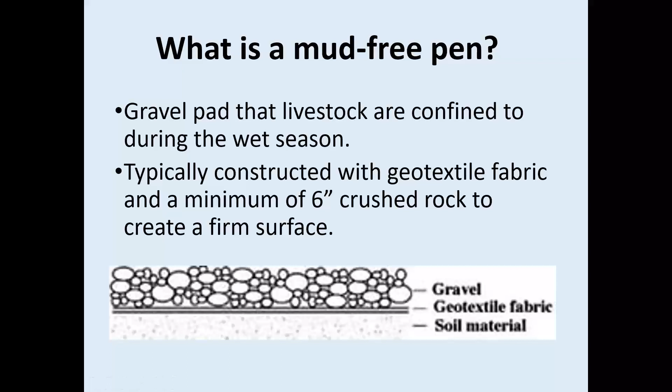The main reason for this fabric is it allows the gravel to float on top of the native soil so it doesn't sink down in. Otherwise, if you were to skip this and just put gravel down on your native soils, the gravel would sink and the mud would ooze up through, and you would still have a mud problem instead of the mud-free pen we're hoping folks will make.

These are really important management pieces, especially on small acreage properties, for keeping horses and livestock, especially during the winter time. We may accidentally refer to them through the presentation as heavy use areas, since that's often what we call them—heavy use areas, mud-free pens, we use the terms interchangeably. Some folks also refer to them as confinement areas, since that's where the animal is confined a lot during the winter, or winter pens and paddocks, and sacrifice areas. So there are a few different terms, but mud-free pen is what we're calling them for this webinar, and a lot of times these are built adjacent to barns and shelters.

Since that is where you're going to get most of your heavy traffic during the wintertime, where you're feeding animals, folks will also build this style of mud-free area around water facilities or around gate areas, just to make sure those heavy traffic areas stay mud-free during the wintertime when we get a lot of moisture.

Why create a mud-free pen? One main reason is to help create healthier pastures. If horses or livestock are out on pastures year-round, they become overgrazed, and in the wintertime soils get very saturated. If animals are out on pastures during the wintertime, it compacts the soil and decreases the pore space, which is important for grass roots and for holding water during the summertime months. Those pore spaces can hold more water and help your grass grow longer. All of the compaction and heavy traffic can lead to bare and muddy areas in a pasture, so mud-free pens, or heavy use areas, are very important for keeping pastures healthy year-round.

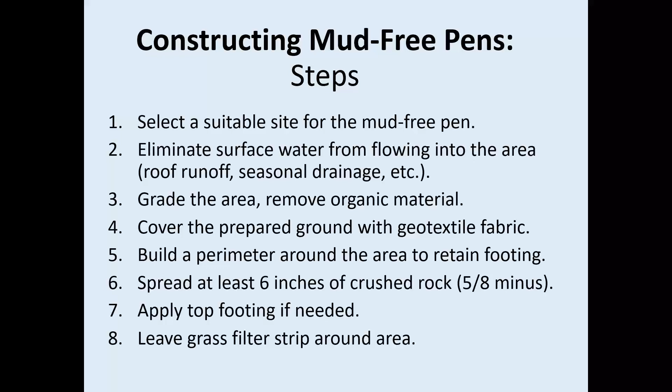Okay, so the first thing is to select a good site. You want to try to pick a high and dry location away from streams, ditches, wetlands, ponds, and as far away from a domestic well as you can get as well.

So many people are already using an existing barn or shelter that they have. If you can build new and create it at the same time you do your barn, then that's where you'd also try to site your barn away from these items as well, away from all waterways. So typically the pens are going to be built next to an existing barn or shelter, just so that they can also be easy to feed the animals in, to get in to clean up manure.

And then it's great if you can even incorporate these gravel sites as a way that a hay truck could access your barn. So that, if you need to get a hay delivery in the middle of the winter, you can hopefully open up gates and they could drive through that gravel area and get right into your barn if you didn't already have some kind of gravel driveway going to it.

It's also a really good idea to think about lighting, if you're able to put up some lights so that you're not out there cleaning up manure in the dark out of the pens, because you do want to clean these areas daily if possible, but even every 2 to 3 days can work out as well.

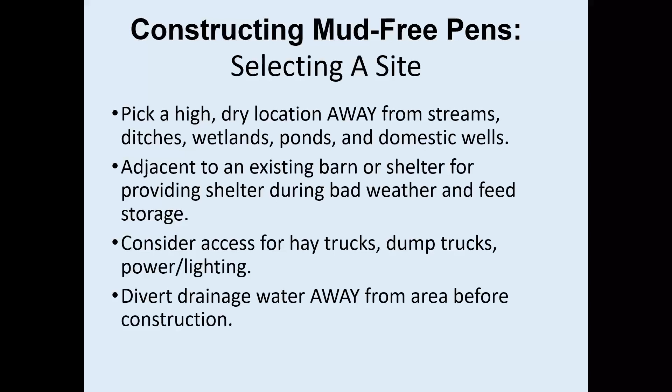So just to put into perspective how much rainfall we get, it really ranges in our county. In Sequim, we get about 16 inches, in Port Angeles roughly 25, then 45 in Joyce, and 118 in Forks. So basically, the further west you go, a rule of thumb is about 1 mile west is roughly an inch increase in rain. And then it also does increase in the foothills as you go up in elevation.

But really, it just does show a good range that we have in our county. It's very diverse. What's interesting is that even in Sequim, you would think with the low rainfall, we wouldn't get that much mud compared to Forks. But interestingly, the soils in Sequim are not terribly well drained. Same with Port Angeles and Joyce, not very well drained at all. So we tend to get a lot of mud in these areas, even though it gets less rainfall than Forks, because Forks has some very well drained soils.

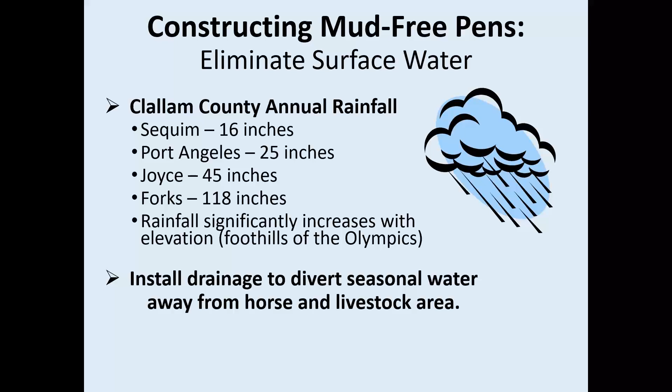So really, we've found that countywide, there's not very many soils that can get away with not having a gravel type of pen in order to have a mud-free winter. Most of the time, they're really necessary to have. And again, as I mentioned, you want to install that drainage to divert any seasonal water away from the area.

So an interesting number is that just 1 inch of rain falling on a 1,000 square foot roof will produce 625 gallons of water. So it's very important to try to keep any roof runoff, even if it's just a small shelter, out of the gravel area, because even a small little shelter can produce a lot of gallons of water a year.

So you want to try to keep clean water clean. That's why we really like to see the gutters and downspouts on there. And you want to make sure you bury the line from the downspout about 1 foot deep at least, just to make sure that you're not going to be driving over it and breaking it. It's actually better to go even deeper if you can, and then either drain it into a dry well or into a suitable vegetated area that's away from animals and buildings.

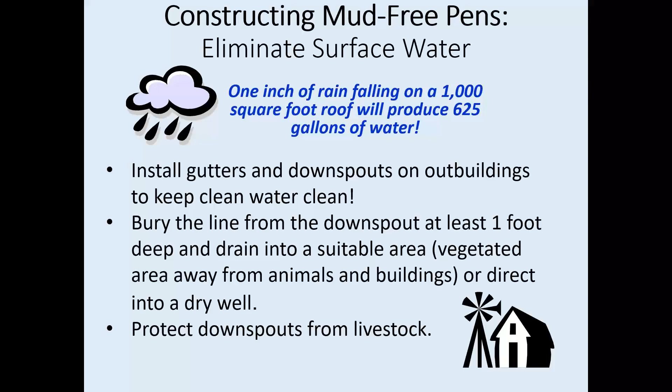And then the other key piece is to make sure you protect the downspouts from horses and livestock. A lot of times they'll rub up against those metal downspouts and just completely crush them. So a better way to go is a very thick plastic pipe, like a sewer pipe, or a metal pipe, or something you can encase them with. I've even seen people use tires around the downspouts if they have cattle, put the downspout on a sturdy post and then surround them with tires just to protect it. But really protecting those downspouts is key to making sure they're not going to get ruined right off the bat.

A dry well is basically a big pit sized based on the size of your barn or shelter roof, usually filled with drain rock and covered back up with native soil. That big pit filled with drain rock takes the roof runoff coming off your roof and slowly filters it into the ground.

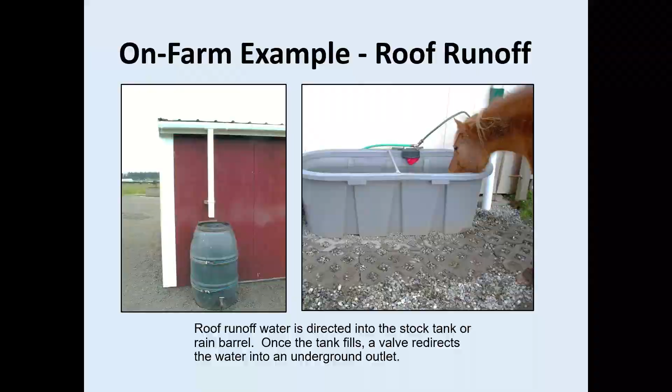The next step after you divert your roof runoff and have your site picked out is to grade and prepare the site. You want to remove any sod or organic material such as manure in the area where you're going to make your mud-free pen. You want to achieve a slope of about 1 to 2% away from the barn or shelter to make sure no water comes back into your barn, and so you get a little runoff of any rain that falls so you don't get ponding.

Some folks who have built pens that are fairly flat have found there is a little bit of ponding, so the 1 to 2% slope has been a good rule of thumb to try to achieve if you can.

Unless you're trying to match up to an existing grade, such as the entrance of a barn you're already working with rather than building new, you don't want to excavate out soil. What you want to try to do is build up as much as you can and not dig down. If you dig down, you can end up hitting a seep or spring in the ground, as well as having more surface water potentially come into the area. Building the gravel pad up really helps keep the area high and dry.

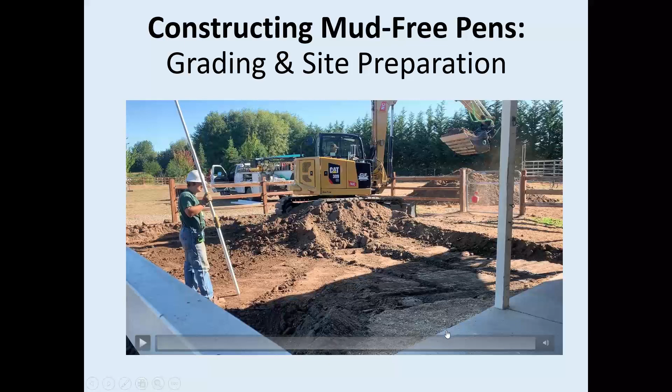You can see in this situation that this is also a barn these folks are working with, and they're having to dig down just a little bit to match up with the grade this barn is already on. If there was no barn here, they wouldn't have to excavate like this—they'd just scrape off a little sod and add the gravel back on. But this is another example of where they have to dig down just a little bit.

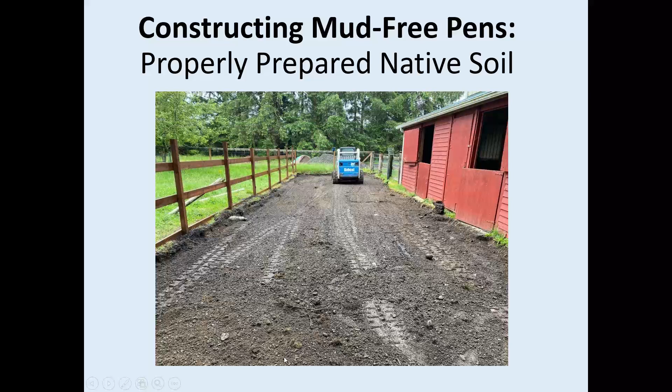Okay, so now we're going to get into the geotextile fabric. This is a very heavy-duty fabric commonly used in road building—forest roads, gravel roads, foothill soils and things like that. Contractors put this fabric down underneath the rock, and like I mentioned earlier, it keeps the gravel from sinking into the native soil, so you're not constantly having to add more gravel and it doesn't cost more money. It does somewhat allow water to go through, but it mainly prevents mud from coming up—that's the big goal of this geotextile fabric.

It can be found at places like Angeles Millwork—I'm blanking on where else, but I know there are some places in Sequim that have it too. Typically it comes in about a 12.5 or 15-foot wide roll, and you can go into the store and buy it by the foot. For instance, you could buy 100 feet, and that section would be 100 feet by 12.5 feet wide. It's best to get the heavy duty, woven material, almost like a tarp, versus the light duty material, which is felt-like.

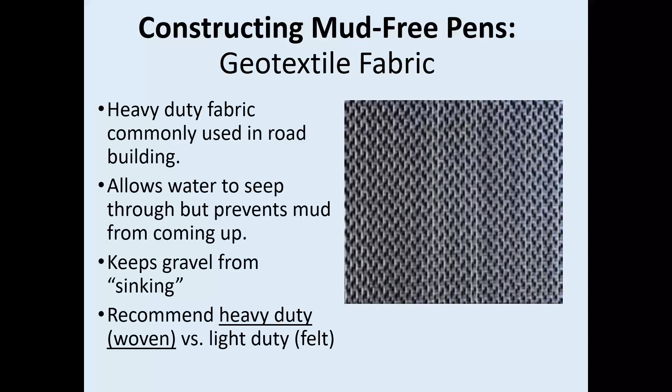The next slide shows the differences. The geotextile fabric here is very shiny, like a tarp—it's woven. Whereas this felt-like material is more like landscape felt, but it does not hold up over time. The true geotextile woven material will last for many, many years. I have one I built about 15 years ago, and there's really no damage to the material. Versus this one with the felt, which actually started to disintegrate, and I believe mud did start to come up in a couple places after just a few years of being installed. So it's really worth paying a little more and sticking with the heavy duty material.

I'm going to back up one slide to make mention of something. In this particular slide, this was one that I built—we dug a little trench around the edges so we could tuck the geotextile fabric in, to keep the edges from unraveling. It's not necessary, but it's one more step to keep it neat and tidy. The other thing we did is use fabric staples, kind of like a big 4 to 6 inch staple, and pound them in various places around the fabric. That way, as we'll see in a couple slides later, the dump truck could back right over to spread the gravel without making the fabric shift or bunch up—it kept it in good position so it could be driven on to be spread with gravel.

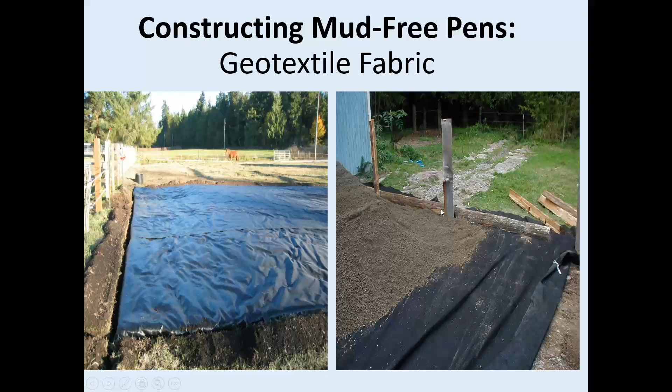Here we are building the perimeter. It's good to retain the gravel. It's not a have-to, but some of the most successful heavy use areas we've seen, I'd say the longevity is increased by building a perimeter. So you're almost building a sandbox for gravel, a gravel box basically. You can use railroad ties, cedar fence posts, pressure treated boards, anything like that, laid right along the edge of your geotextile fabric, and then build the gravel up against them to retain it so it isn't spilling out into the native soil. When it spills out onto the native soil, grass tends to grow up, and over time it can be more of a maintenance hassle.

These railroad ties are actually one of the ones I've built. Rebar stakes were used to anchor these. There are holes drilled in each end of the railroad ties, and a 3-foot section of rebar was driven down into the soil to help keep these in place so they didn't move.

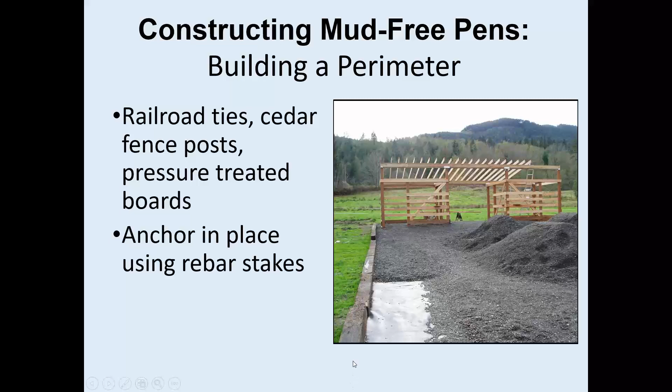And the other thing I did is make sure the fence was put on the perimeter of these railroad ties. That way the horses aren't walking directly on the edge of the railroad tie. What can happen if they are is it tends to push the railroad ties outward.

The same thing applies even if you had no perimeter and just laid your gravel right down with grass alongside it—you'd still want to put your fence offset a foot, maybe even 2 feet, to keep the animals from walking right along the edge of the gravel, which would cause it to slough off over time. It may even cause the horses, cattle, or whatever animals you're putting on these gravel areas to get down to the geotextile fabric.

If they do get down to that fabric and cause a hole to be made in it, it can cause mud to seep up through these areas. So you really want to protect your geotextile fabric at all costs to ensure you're not having mud come up through a torn spot in the fabric. And if you do put your fence on the outside edge, just make sure you offset it by a hot wire. That alone can keep the horses backed off enough that they're not walking right along the edge.

The next thing you'll do is spread the crushed rock. In this instance, this is the same one I've been referring to that I built. The railroad ties are already in place on the opposite side from the dump truck, but we knew we wanted the dump truck to spread along this edge to save time. So we had him start spreading all the rock, and after he'd spread quite a few loads, we came in and put the perimeter up along that far edge.

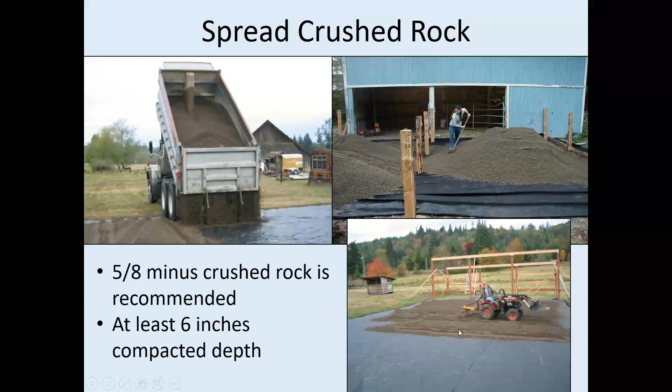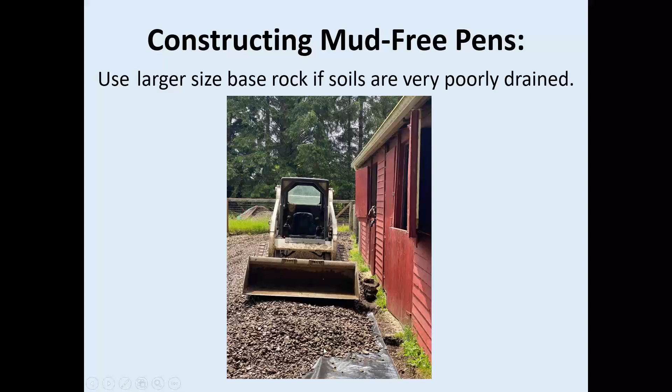Some folks will use a larger size base rock underneath that 5/8 minus if their soils are very poorly drained, or if they need to build up quite a bit. We've had a few instances where people build their barn at the top of a fairly steep slope, and then they want to install one of these areas, but at the far end they might need 2 or 3 feet of material to bring it up so it's not such a steep slope. That's another time where you can use a larger size base rock for better drainage, or perhaps the larger pit run size material, which is typically cheaper than 5/8 minus. So you can spread that, and then put the 5/8 minus on top.

A really key piece is to compact this rock as best you can. So if you don't have a contractor out there with a roller, what you're probably going to want to use is a plate compactor.

As you can see this gentleman using one, I'm going to play this video really quick so you can see they're quite easy actually. Once you're able to get them unloaded out of whatever you pick them up in - I believe you can rent them at D&K Rentals and Angeles Millwork - they're almost just like a walk-behind lawnmower.

You can really just kind of walk behind them and they vibrate in place, and pack down all that gravel. The other thing to note is you don't ever want to go above 4 inches in depth for gravel with the plate compactor. So you can't just put all 6 inches of gravel down at one time and then compact it - it's only going to compact about 4 inches at a time.

So most people do their heavy use areas in 2 shots with the gravel. They'll get about 3 to 4 inches laid down and then compact it, and then get the final 2 to 3 inches down and compact that again, just to make sure it's packed very good, because you really want these to almost be packed as hard as concrete.

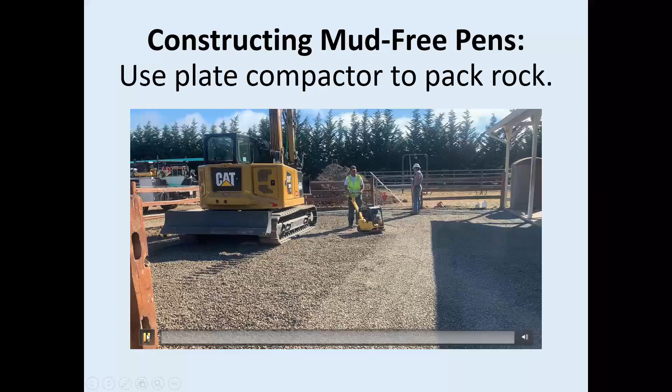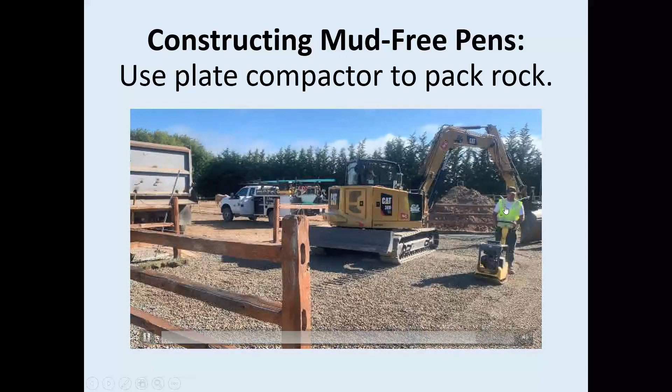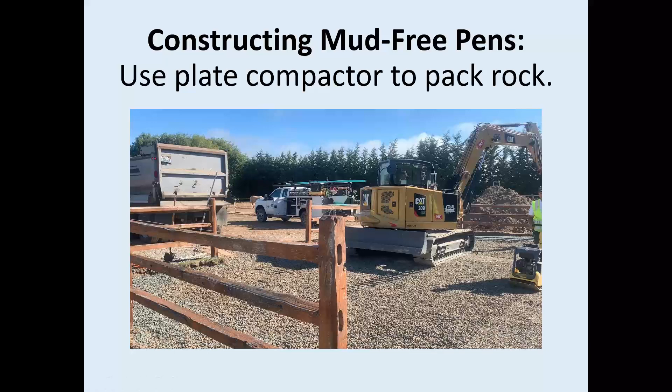I'm just going to play this video really quick so you can see him operating this. You can see he just walks right behind it and it kind of vibrates along. Turning is really, I think, about the hardest part of it - actually unloading it and loading it in the vehicle is probably a little bit harder. But these are very crucial to building a really well and long-lived mud-free area.

One other thing that some people like to add is a top footing. We generally don't recommend using it unless someone feels it's absolutely necessary for an animal's health or things like that.

What can happen with the top footing is, for instance with pea gravel, I had a very unfortunate circumstance where I put some in one section of my heavy use area, thinking it would be a great area for the horse. I was kind of doing it as a trial run, thinking it'd be great for her to go and lay down. Instead she would run to that area of her pen and do a sliding stop, so the pea gravel ended up mixing in with all that motion, mixing in with the crushed rock, the 5/8 minus underneath.

The 2 gravels mixed together, and since pea gravel is a round rock, it won't pack. So it was able to work into that 5/8 minus, and then she was able to start pawing in that area, which led to her pawing all the way down to the geotextile fabric, ripping a hole in it, and then the mud seeped up through there. So I dug the whole section out, patched it, and it just never was the same.

The mud would still kind of be able to seep up through that patch. So, lesson learned: unless top footing is absolutely necessary, it's kind of a good idea just to stick with the 5/8 minus.

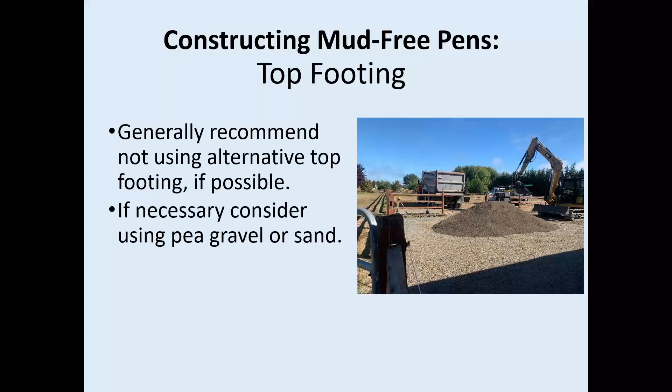Then just kind of see if your horse does need a softer area to lay down in. Sand can also be used, but there can be problems with that in that it can sometimes get some ponding. What we actually recommend instead is, if you do feel like a softer surface is needed for laying or rolling, stall mats or building a sandbox in a corner using shavings, sand, or hog fuel can be a really good way to go.

Okay, one other thing I want to back up on for a second. If you do pea gravel, we've had people have success, especially with older horses, doing pea gravel over the entire heavy use area. If you maybe only do an inch or two of pea gravel over the whole area, and it's an older horse that isn't going to be moving quite as much or doing sliding stops like my young horse was doing, then it can be successful to do that.

We've had a couple folks do that. One had draft horses, and the draft horses were laying down on the 5/8 minus and getting a little bit of sores on their hocks. So he put the pea gravel on top, and he was very happy with how that worked out.

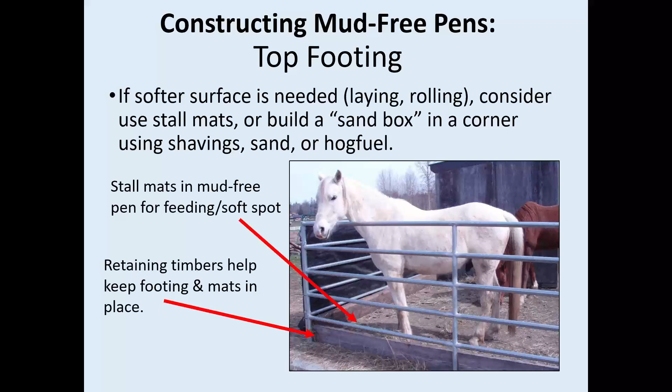That can also help if you have a horse that doesn't have very good feet. The pea gravel can actually be really great, and is recommended a lot of times by farriers to help stimulate the frog on the hoof for better hoof growth. So that can be another advantage to pea gravel. But again, I really would caution sticking with the 5/8 first, and only doing the top footing if there became a problem that you might need something different for.

Okay, so filter strips - this is the last thing in the construction steps that I wanted to address. Installing filter strips on the downhill side of the pen are really great to capture manure and sediment that might run off the gravel area. The width of the strip is going to be dependent on the slope of the land, but you really want it to just slow down that water coming off the gravel area and try to capture some of that manure and sediment.

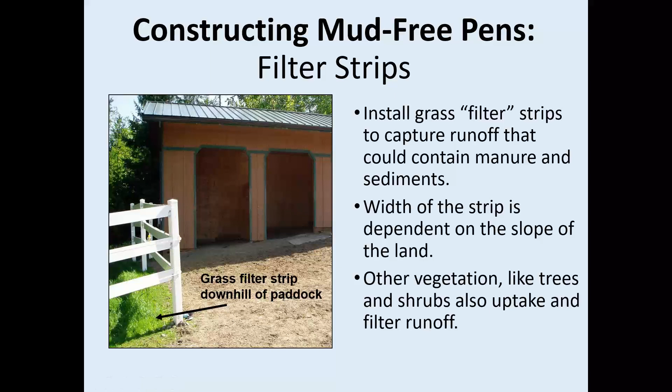You can also put other things in there - it doesn't have to be grass. It can be shrubs or things like that, but just anything that can help uptake and filter any runoff. You really wouldn't want to have a waterway just adjacent here, or a bunch of gravel that then continued on to a roadside ditch. You want to try to have that grassy filter strip to keep that contaminated runoff from going into waterways.

Okay, so that concludes the construction part of the mud-free heavy use areas. If there are any questions, I do see there is one question in the chat.

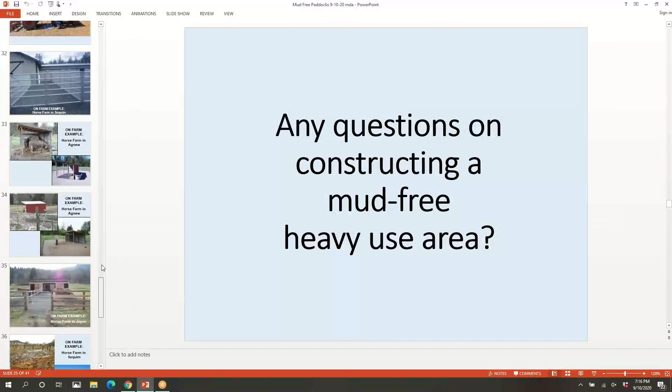Oh yes, thank you - Jennifer popped this up for me, that the geotextile fabric is available at Angeles Millwork, Hartnagel's, and then it may also be available directly from local contractors that do excavation earthwork. So thank you so much, Jennifer, for mentioning that. I was just having a little bit of a moment there where I couldn't remember where all we could find that.

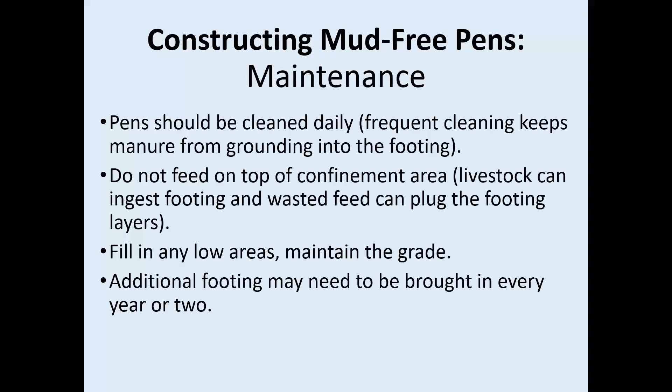You probably are also going to need to bring in more footing over time. Our ground is constantly settling, and there'll be areas where livestock tend to congregate or walk that will pack up. So you'll probably need to get in the habit of bringing in some rock every year or every few years.

So I mentioned a little about cleaning, and this really gets directly into the mud management piece of this puzzle, because livestock manure has a lot of moisture in it naturally. So the simple act of cleaning up manure will make a big difference in keeping these pens dry. The challenge is if you don't construct these mud-free gravel pens, as soon as we start getting fall rains, it's going to turn into a muddy mess, and you won't be able to tell what is mud and what is manure, or push your wheelbarrow through. So once you have these gravel pens installed, cleaning up the manure on a regular basis will make a long-term difference in keeping these pens around and keeping your livestock healthy.

We recommend that you store the manure collected from your mud-free pen in some sort of structure. If you don't have a structure, even a pile covered with a tarp is sufficient. You want to keep these manure piles covered because we get a large amount of rain in a very short period of time, and there will be runoff off that pile if it's not covered. That runoff has nutrients in it, which are great for your gardens and pasture. But during the winter, if your pile isn't covered, you're losing those valuable nutrients, especially nitrogen, which we tend to be low in around here, and which moves readily with water.

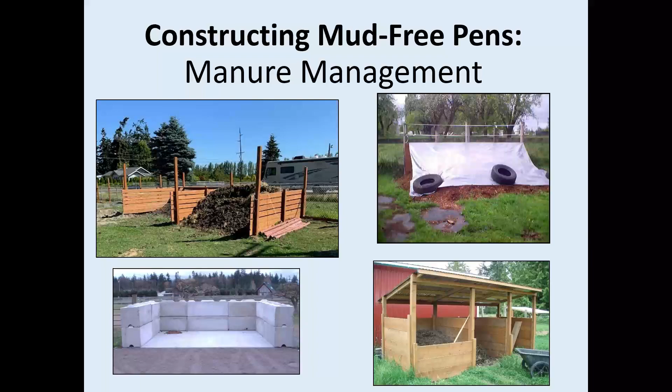Behind me, you'll see a pumpkin on a fence post and a large pumpkin patch. Every year, my kids and I have a great time - we take composted manure from the year before and pile it up in this particular spot, which is away from surface water and wells. It's usually about 2 to 3 feet deep and about a 12-foot circumference. Then we plant pumpkin seeds directly in that, and the pumpkins love growing in the partially composted manure.

This video is about the importance of having quality tools. The first Rubbermaid cart - I love this cart. It's an all-terrain vehicle with all-terrain wheels, very easy to maneuver to get in and out of pens. When constructing these pens, the more gates you can afford, the easier it's going to be to clean them on a regular basis. But this cart is really nice because it's easy to get in and out of the gates, and easy to dump. Investing in quality tools is really key.

This is already kind of an unpleasant job, going out during the winter months to clean these pens, so whatever you can do to make life a little easier, definitely do. A lot of times during winter, especially with freezing weather, you'll break the tines on your manure fork. Just go ahead and run down to the feed store and buy a new head for your manure fork to keep it in good working condition.